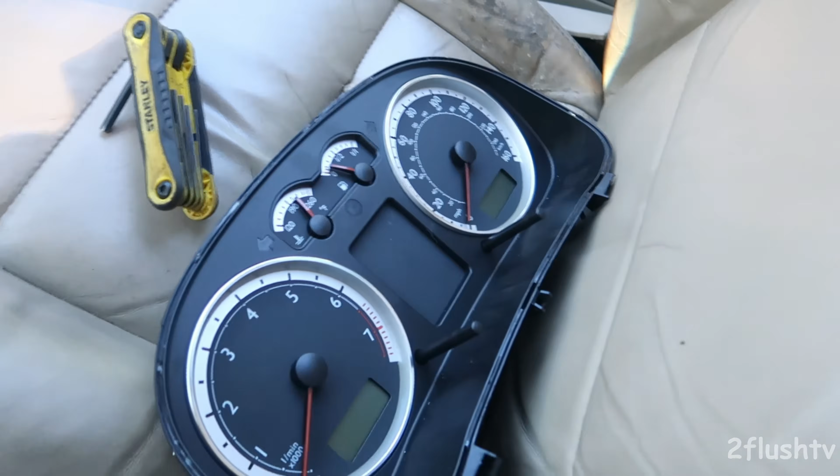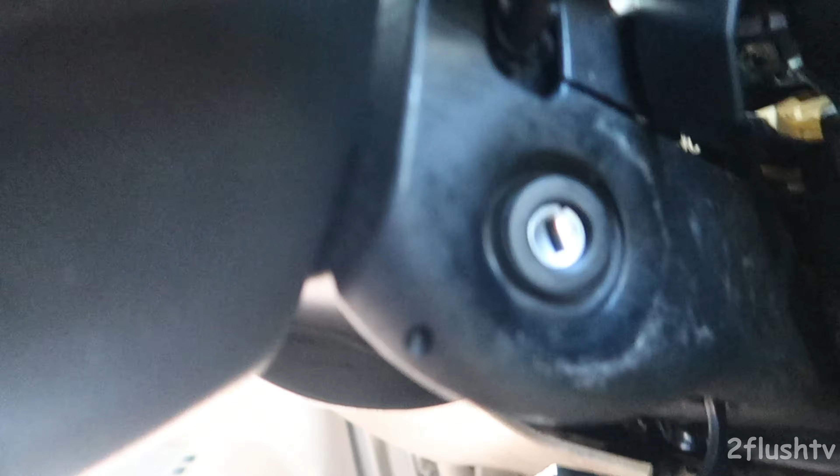So check this out. I went ahead and ripped that cluster out, and these are pretty much the plugs that I need for the Mark IV cluster over there. I need these plugs, so I just gotta figure out where they go and how far they come down, and just rip them all out. I think I'm gonna take this clamshell off too and take this key switch out of here.

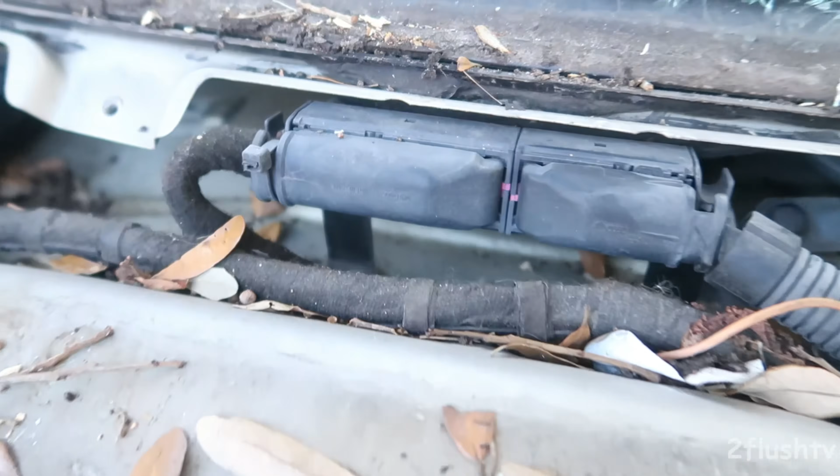So that is one of the plugs that I needed right there. I think the big one is the one that goes to the motor, and then I think that is the accessories one. That's the one I needed, and it just follows down into this firewall and comes under the tray and then connects to everything.

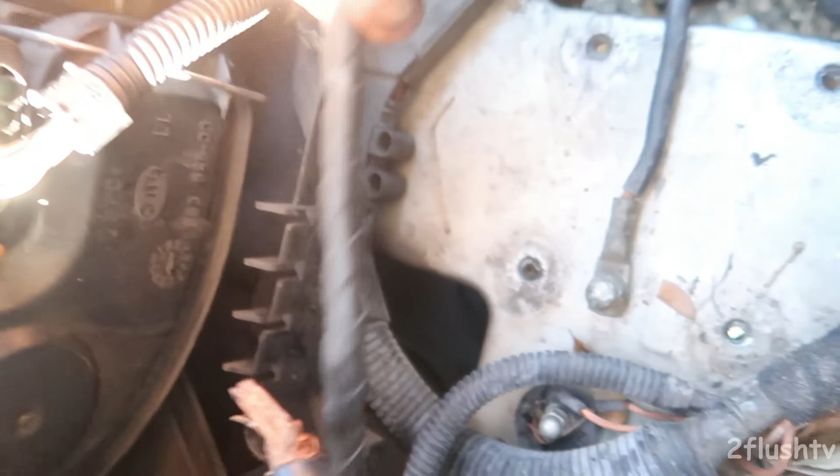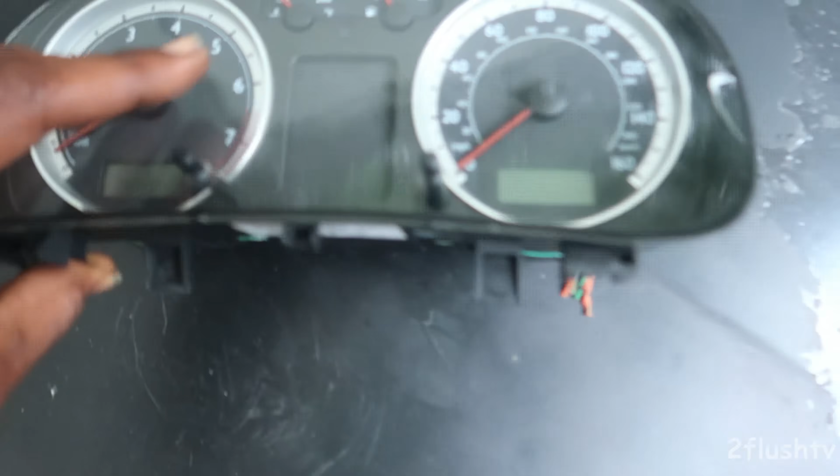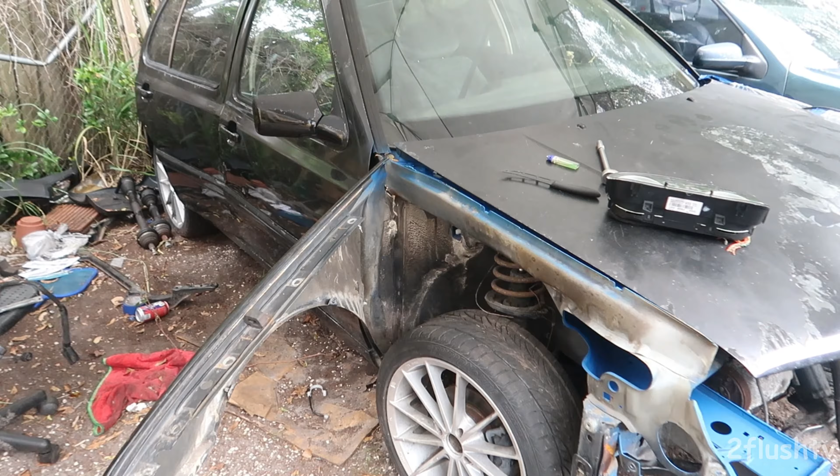Well, it's the next day. It's cold, it's rainy, I'm confused with this Mark IV. I'm all over the place. I don't even remember what I was doing or where I left off at, but this is all confusing to me. Now, granted, this is the first car that I've ever completely built, swapped, did all of this to.

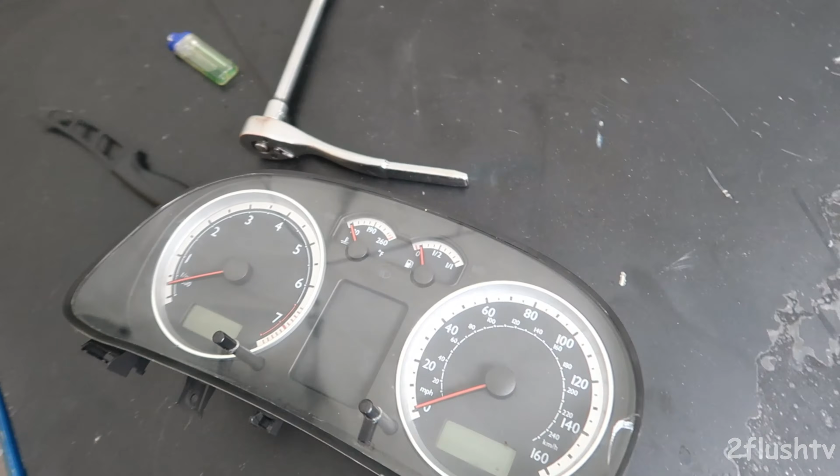And me doing the valves on that is the most that I've ever done to that car. So, check me out here. I'm trying my best here. I'm super confused, but check me out.

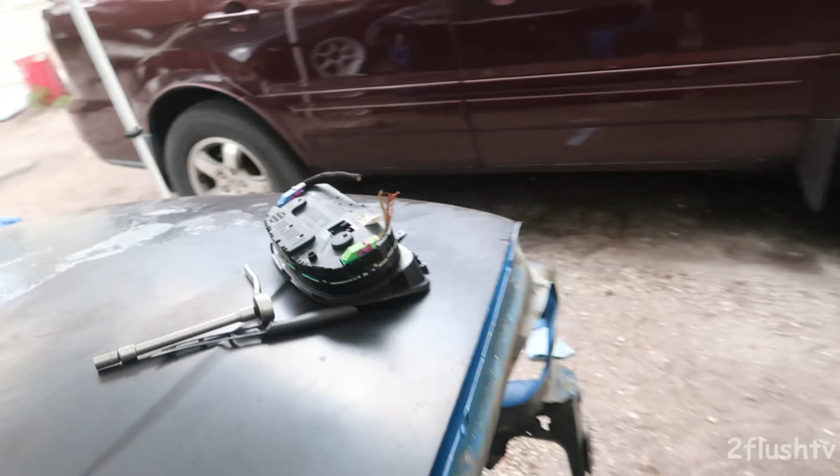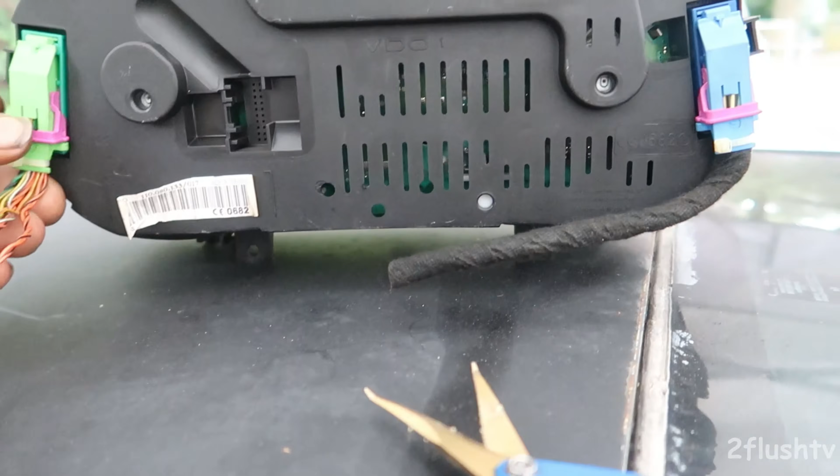This is the cluster for the Mark IV. That is the cluster for the Mark IV, and these are the pins that I needed that I did not have, the plugs. So these plugs are not the same for the Mark III. The Mark III has different plugs, which has one single plug, just like this, with everything wired into this one plug.

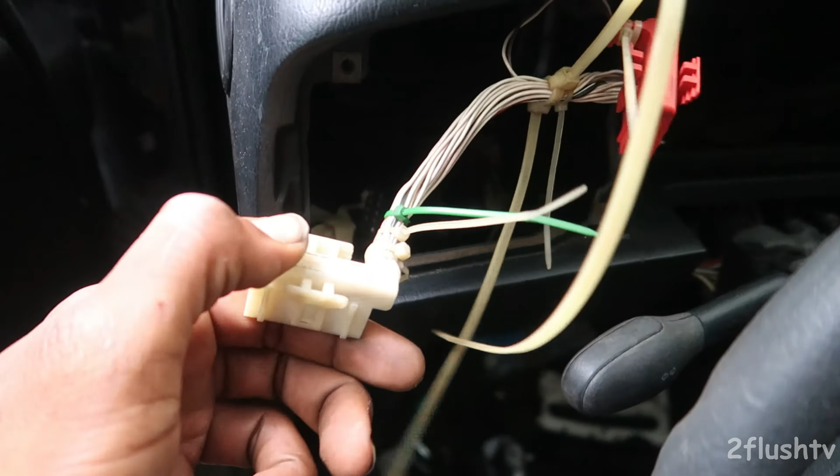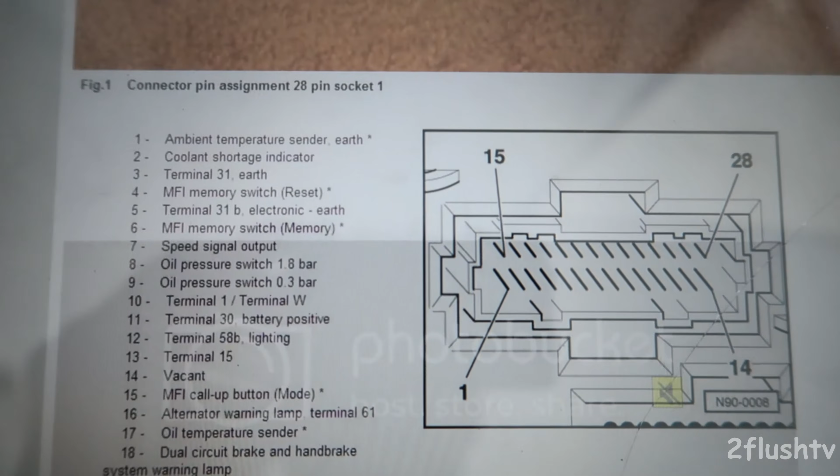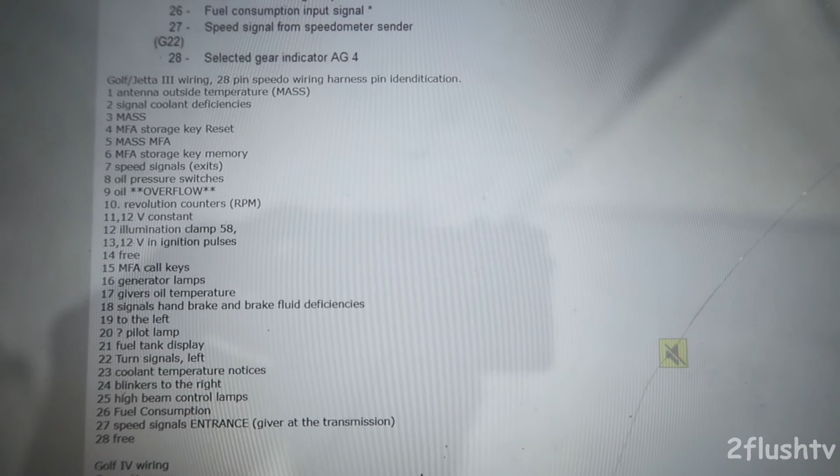Jumped to a forum and found this forum. It's on Vortex, so just in case anybody asks what forum I went to. A guy was trying to do the same swap, and pretty much he found the whole pin layout, all 28 plugs, all 28 pins for the Mark III. And then all of the Mark IVs are right here.

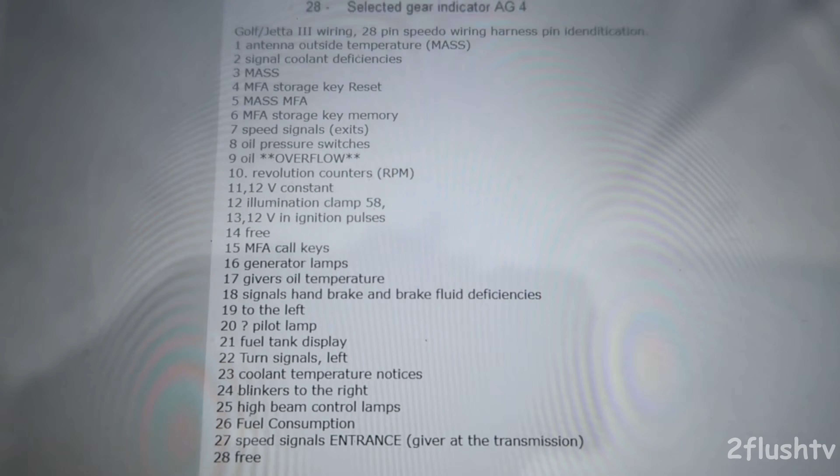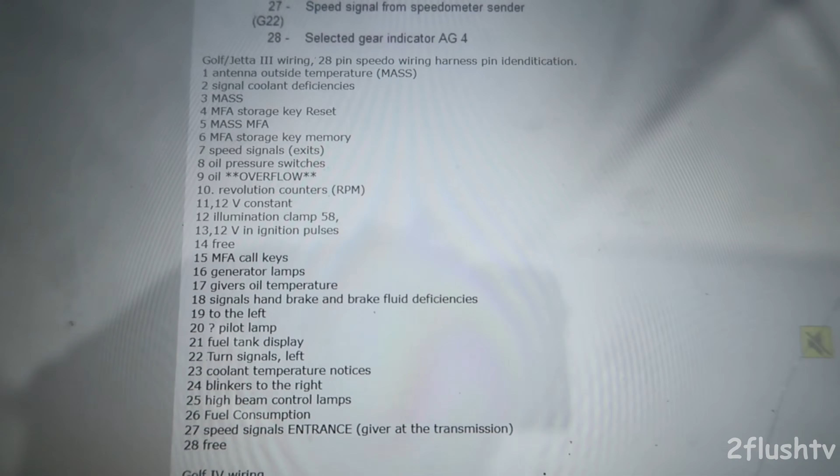Blue harness and green harness. So I think what I want to do is use this same layout of where all the pins are, and I'm just going to splice into this harness. So like those plugs, I'm going to plug them into the Mark III spots on the harness, like the mass air sensor, constant 12 volts, the oil pressure, the fuel, all of that stuff, and then find it over here in the Mark IV one, and then just plug and play it.

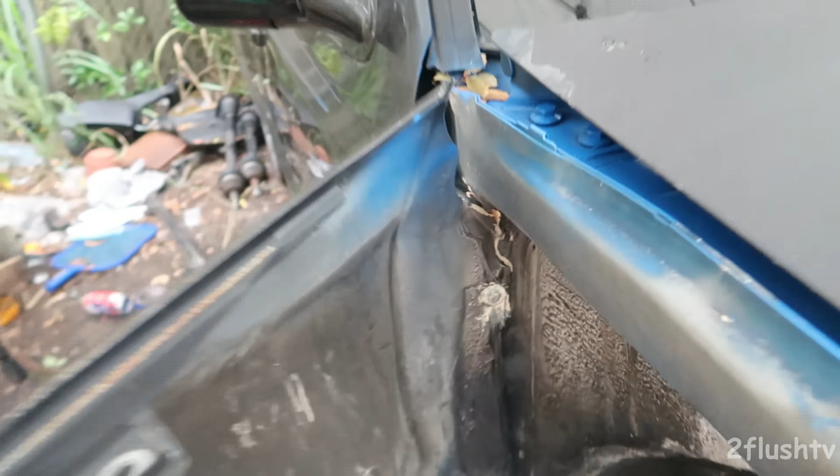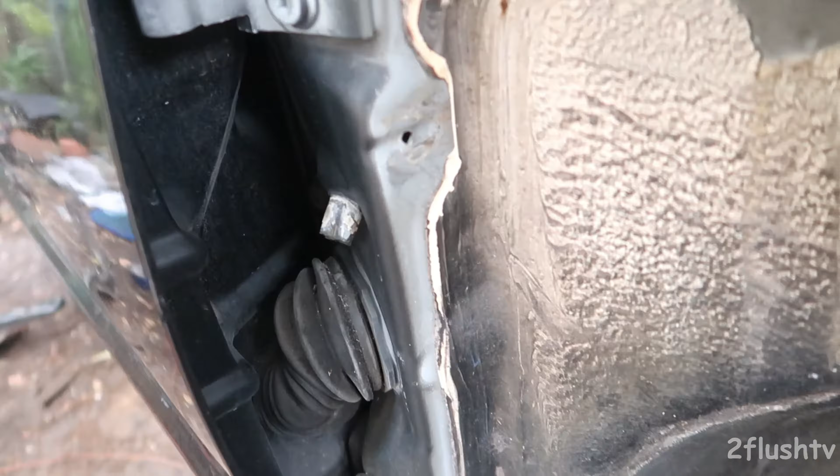But off of this complicated stuff, onto more complicated stuff. I sat here for probably 30-40 minutes peeling back the glue that was stuck on this bolt to get it out, and man, that was dumb. All that glue that was there, dumbest stuff they ever put in these cars.

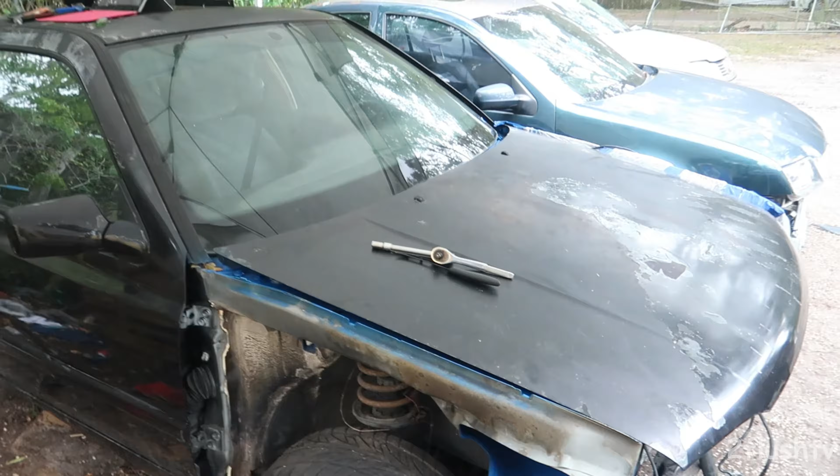I'll say this again, that green one is my first Jetta, my first Volkswagen ever, and this black one is my second one. On my second one, I'm up here trying to do a whole 1.8T swap to it. Wasn't planning on doing it, but I'm doing it. So if any of you guys know more than what I know, please feel free to comment down below, and don't jump in the comments and be like, this guy has no idea what he's doing. Sure, I'm sitting here saying it. That's my first Volkswagen right there, it's a VR6. I just changed the valves in it. It's right there. And this is my second one.

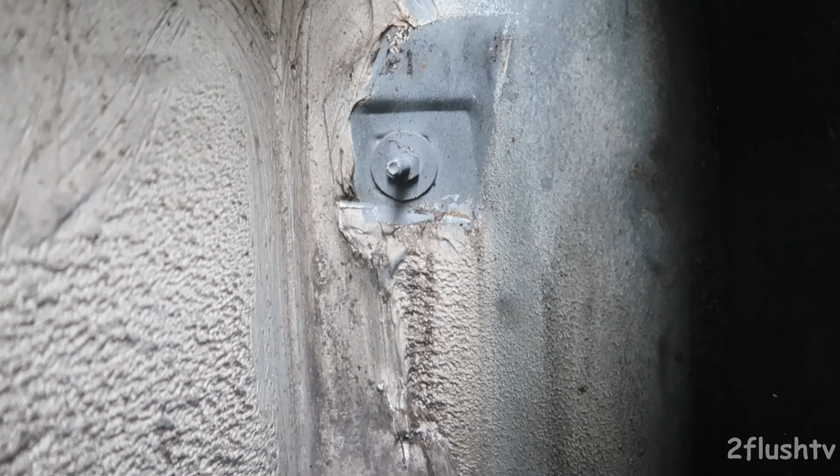Haha, you're wrong. But I need to get this one off too. So the top one wasn't bad because it had the antenna on top of it, but the one at the bottom right there, you probably can't even see it. Right there, it has so much glue caked on top of it. Now I gotta go through and cut all of that out.

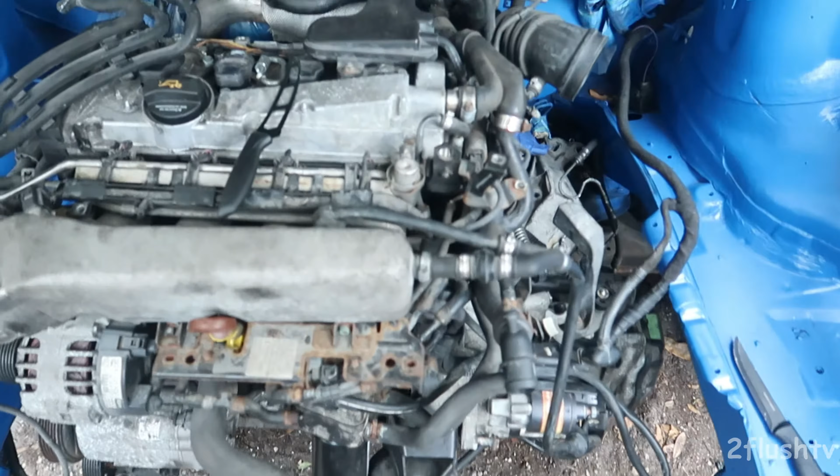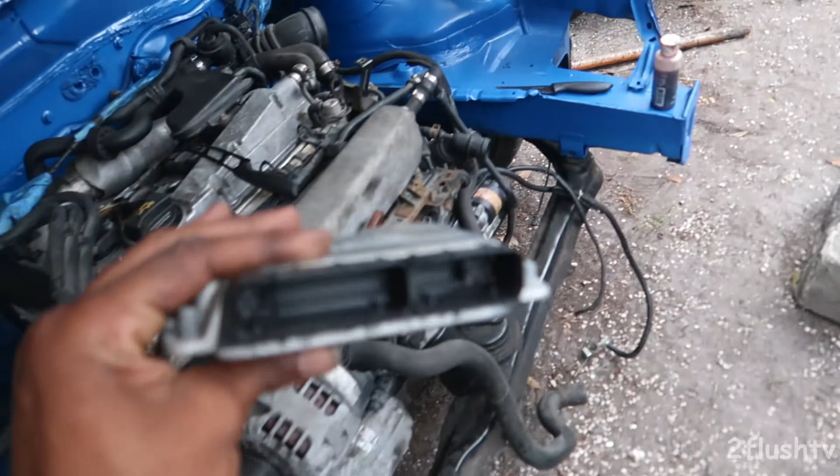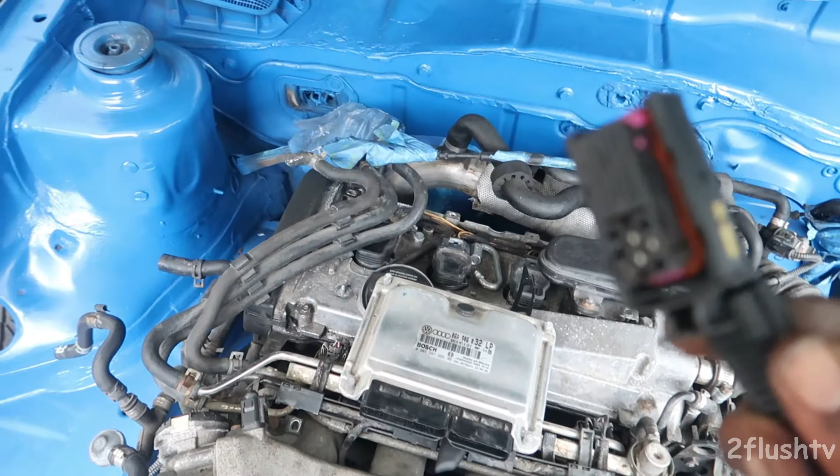Oh yeah, here's the other fancy thing. So, with the ECU here, everything that I thought was gonna be easy, unless I'm looking over this, is on some other whole nother wiring crap. But this is it right here. This is the main engine wire.

This is the main engine plug. It goes into this. So that goes in just like this, and this is how the ECU runs into the motor. Perfect, I get it. Now there is another one that comes off over here. There's a big one.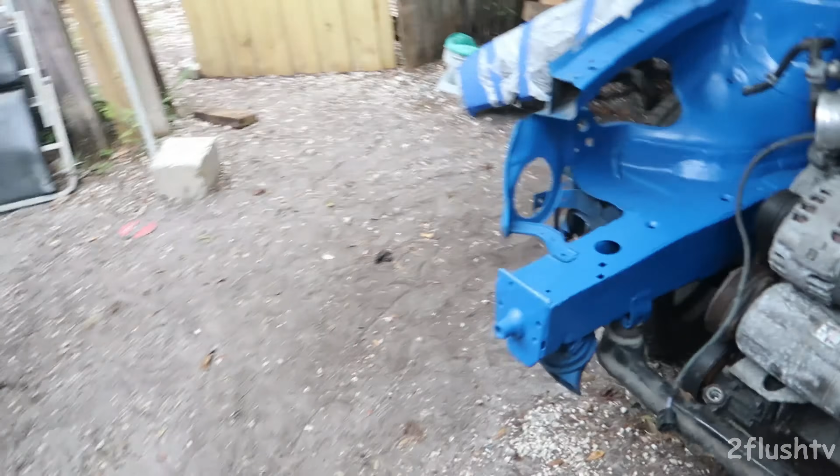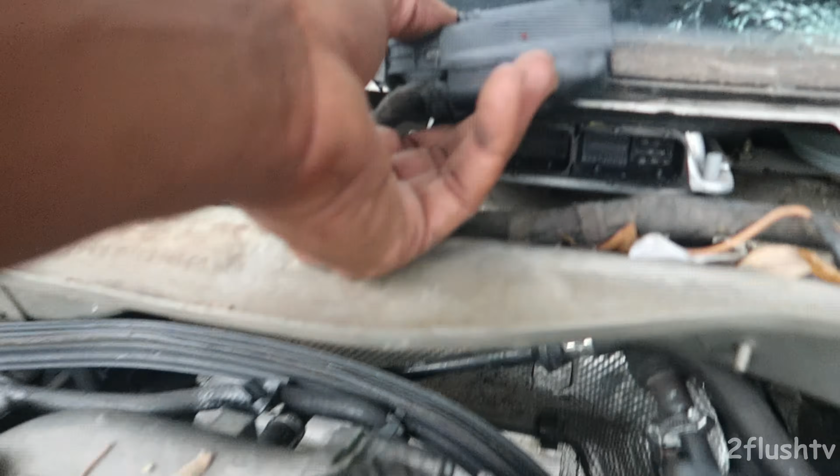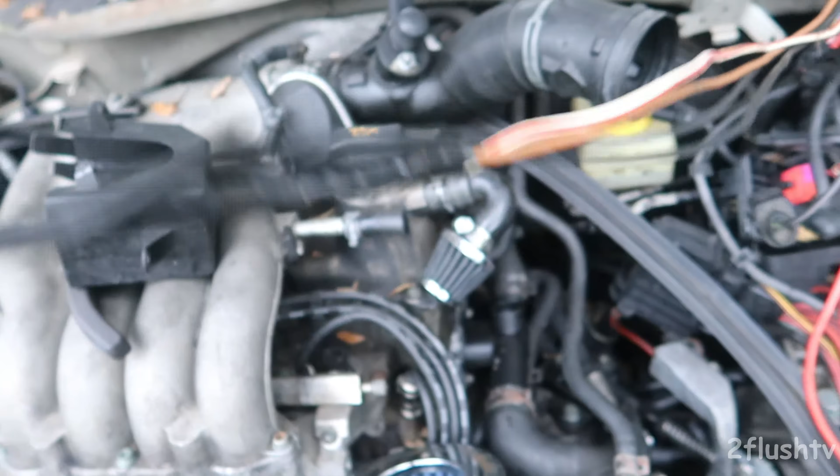So the main harness goes into this one. This one runs the motor and everything. Then there is this one, there's the big one, and that one is this big plug right here. So this big plug has all of these wires in it that goes to the starter and the clutch.

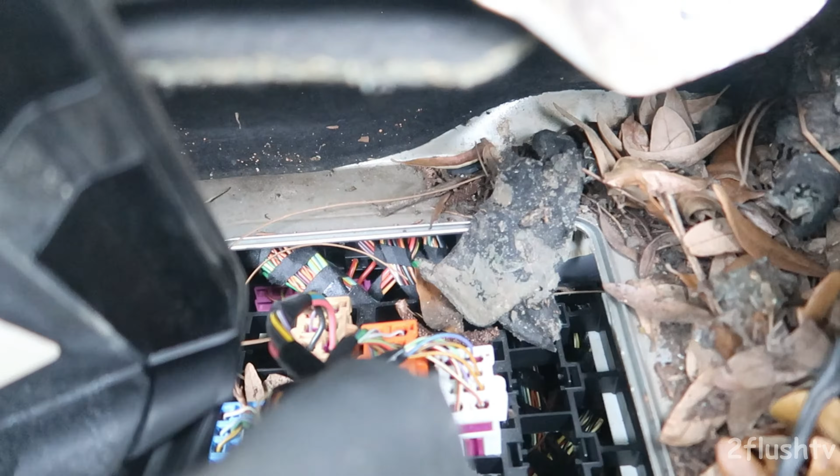That's what I'm stuck trying to pull out right now. I'm having the toughest time trying to pull all of this harness out. Now I honestly just really want to cut it right here, but I'm like, why cut it? Because I think I'm pulling off all of the front, which has the headlights and everything into it. So I feel like I just need to pull all of that wiring out, but then that means pretty much pulling out the whole dash, because all of that runs into the fuse box and onto the dash.

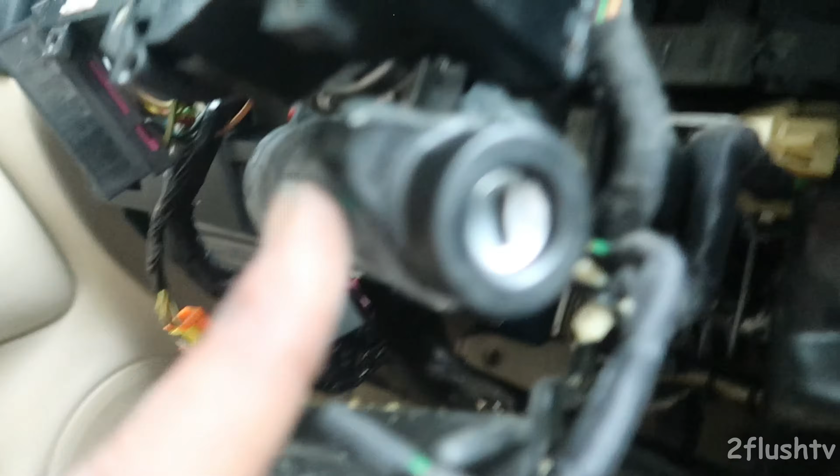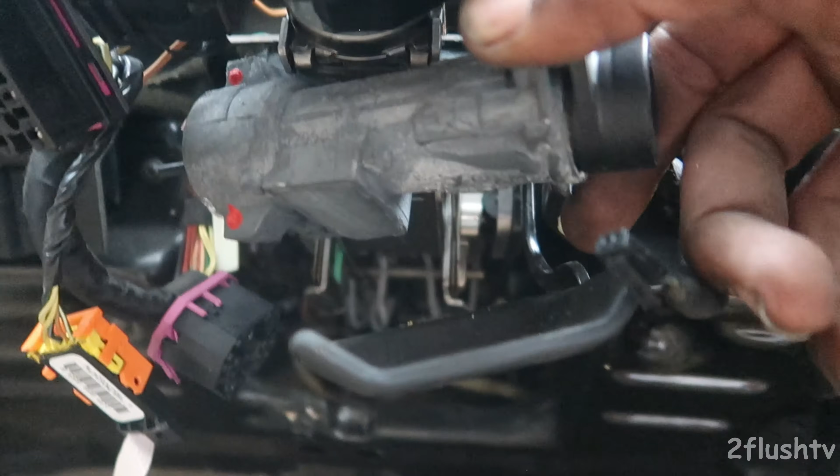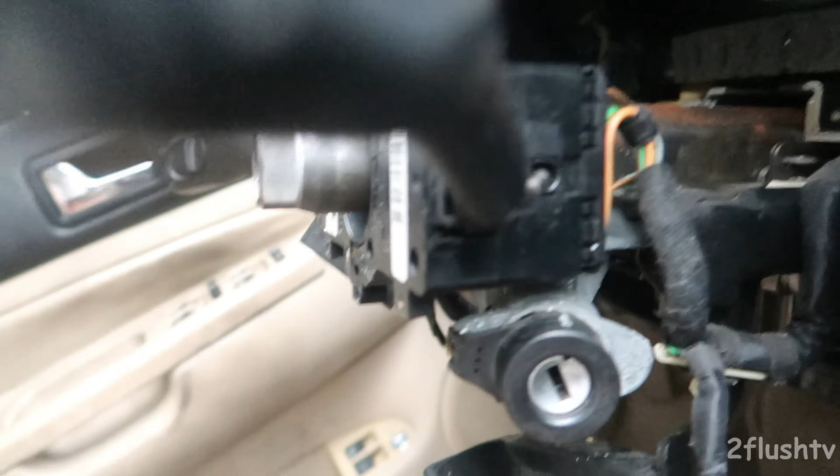And then there is the confusing part of the key part right here. Now I don't know if I'm supposed to take the black part out right here or pull off this whole key assembly, but this does not come off, at least from where I've seen. This does not come off. I mean, maybe it does, but yeah, I can't seem to finagle that off of there. So that is where I am at. I'm pretty much stuck on this part.

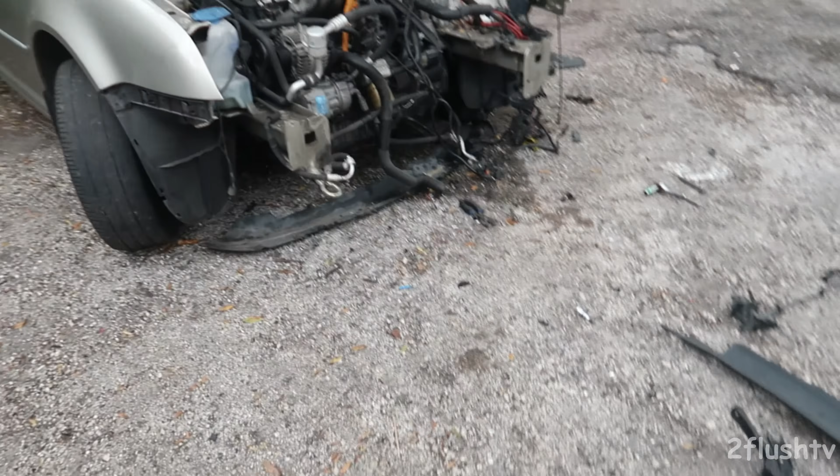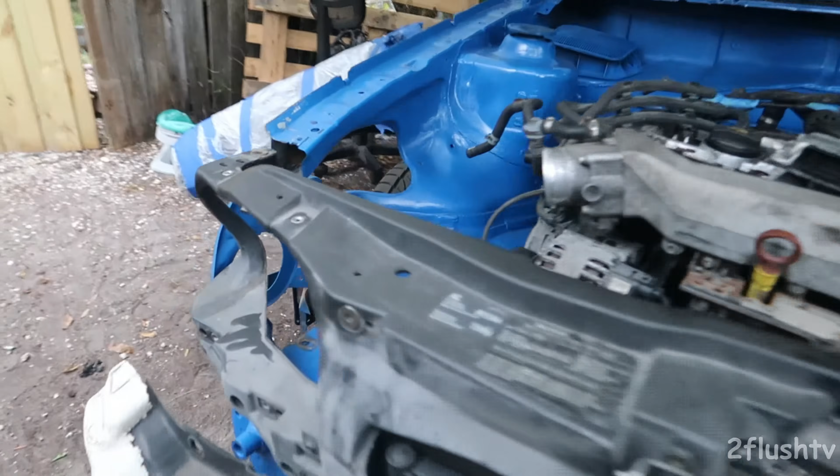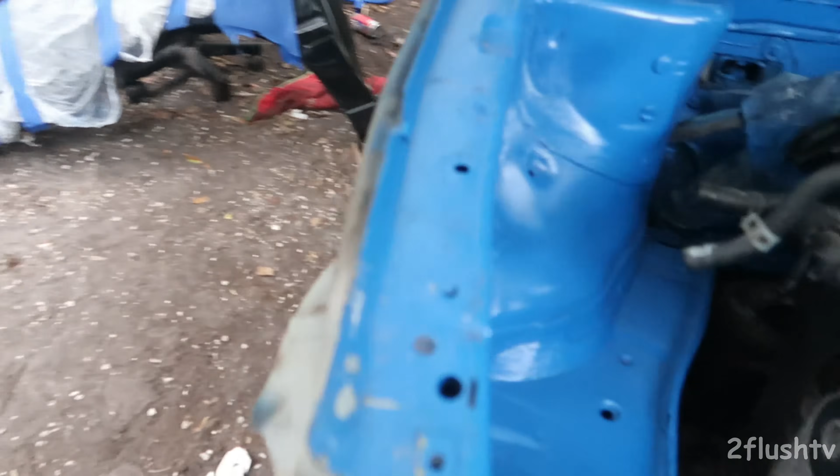So I managed to get the front end, the front radiator support off, and the bumper off. There's the bumper, and I was trying to line this up, the Mark 4 face up on the Mark 3. For the most part, it fits. I came into two main problems. The part of the radiator support really doesn't fit all that much.

If you can see right here, this side is pushed all the way up in right there, and then this side is off just a little bit. Now I have two options I can do. I can take this and push it out more, or I can take this and cut it. Either way, it just needs to slide up in there just that much.

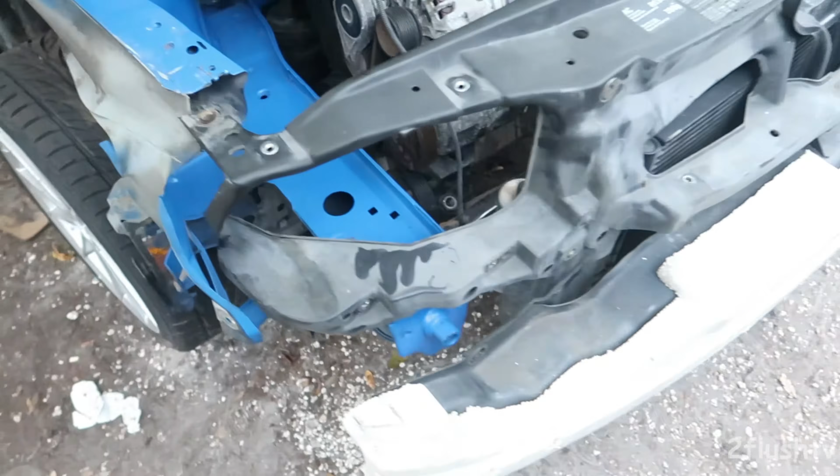But other than that, the rest of it does fit. It clears the bottom. This part of the radiator will be under the support right here, and everything else does go ahead and clear. So I am super happy about that. That works out super perfect.

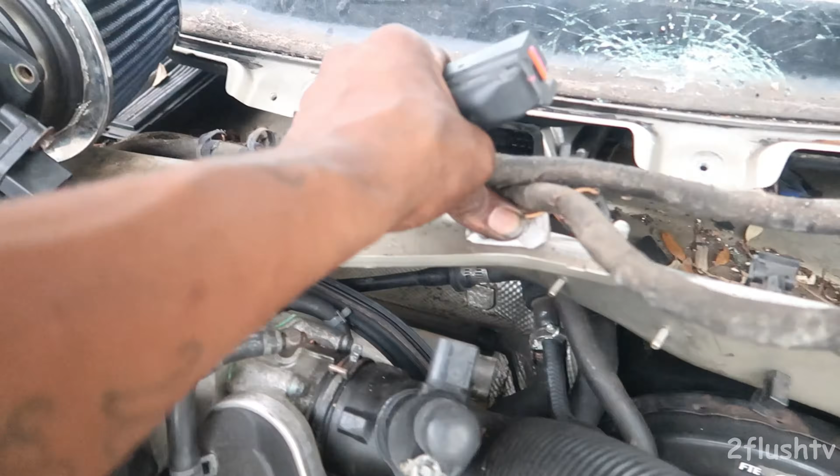And now with the harness, this is what I've really been working at, trying to get this harness out. Like I was saying, this is the other piece of the harness plug that I need right here, and this pretty much controls the front end, the starter, and the clutch. So, and a lot of this goes to the dash, and it's inside of that right there.

So I need to pull off all of that, and then I'm probably not going to use any of this, so I'm probably just going to cut it all off and not use it.

But other than that, I am wrapping it up with this Mark IV right here. I still do need to go ahead and pull off the hub assembly, and I need to pull off these back tail lights because that is going on the Mark 3, and finish pulling off the mud flaps. Go put that back in the house.

Okay, I think I'm just going to remove these plugs right here. I need to take a picture of this right quick so I remember. Looks like purple goes to white, black goes to purple, orange to orange, pink to pink, blue to blue. Let me take a picture still.

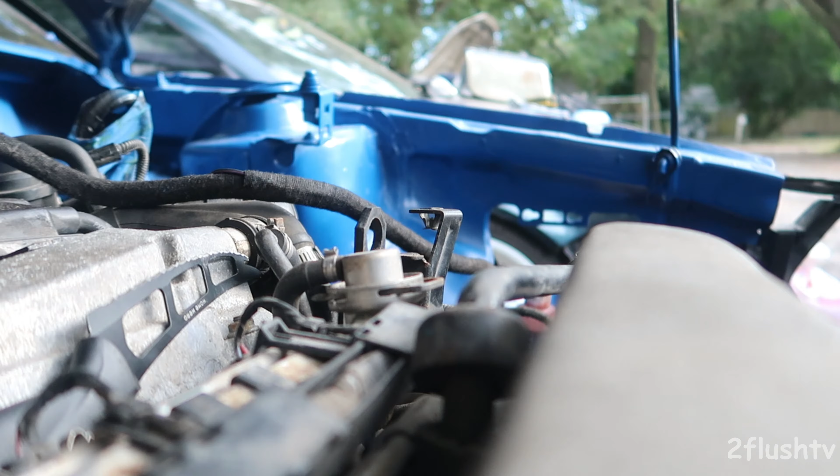Alright, so I just got the plug off of the Mark IV. Now this was one of the main plugs that I was saying I needed right here. This part goes into right here. Now, let me open it up first. So yeah, that part goes into that plug right there. Now, I needed that.

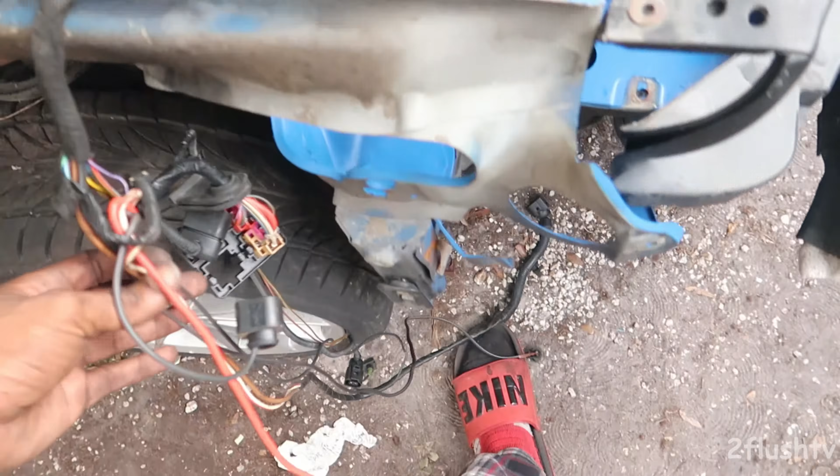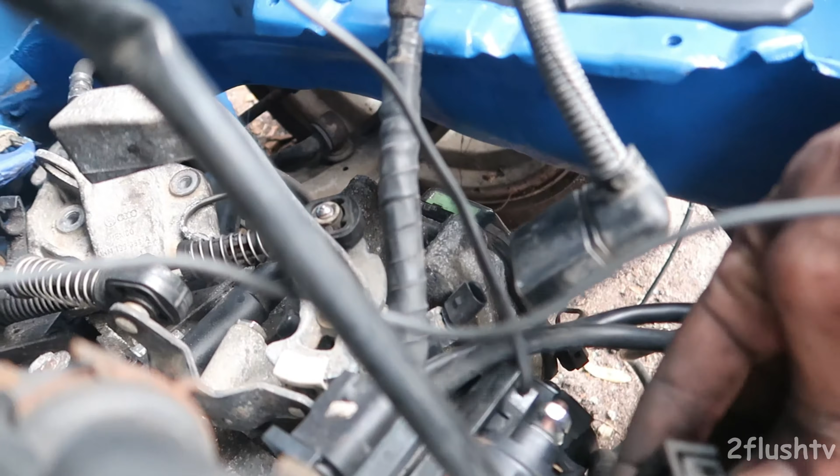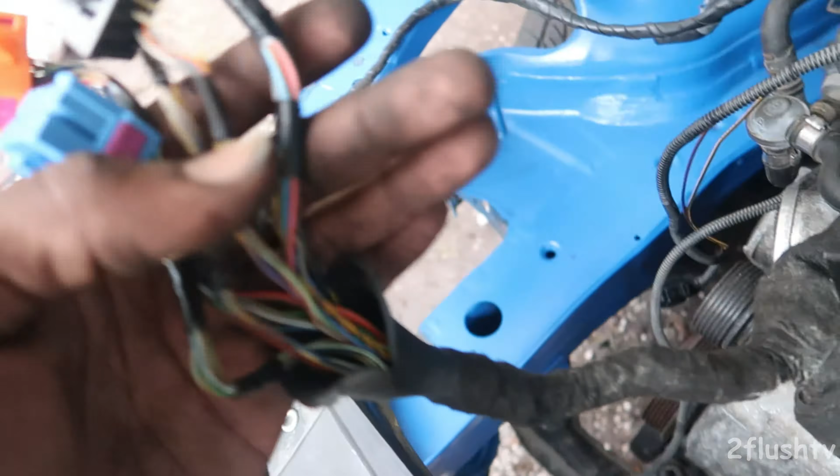I don't even think I need all of this. Maybe I do, maybe I don't, but I don't. All of these plugs right here, I don't think I need all of these, because at the end of the day, I really only need this plug right here, which goes into the starter like that, and then there is this plug right here that I need that goes into the right there. So at the end of the day, those are really the only two plugs that I needed, and I needed that to go into there. So I don't really think that I need all of these plugs. Maybe one of these plugs powers that down there, but I don't think I need all of these.

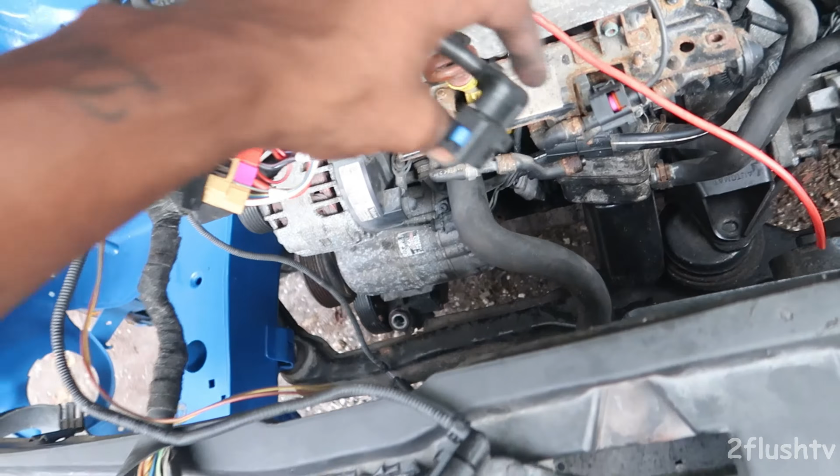So again, that is where I'm at. I know I say that a lot, but this wiring system is very confusing to me, and I am learning as I go. So that's where we are.

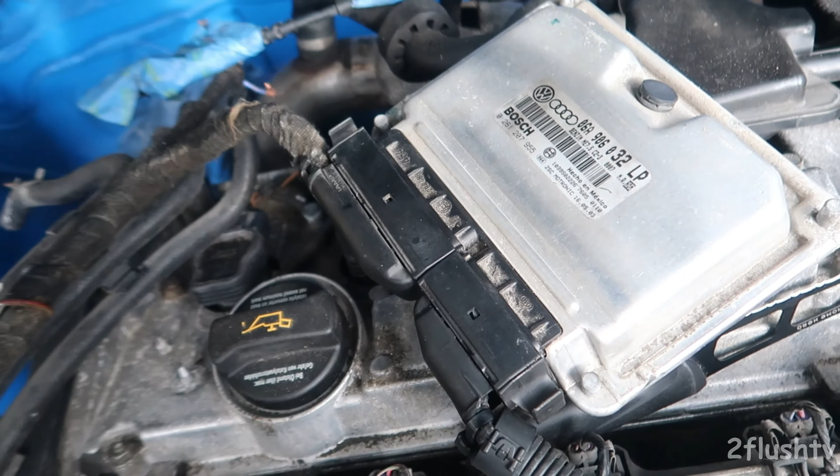I do have all the plugs to the harness though, for the ECU. I do have all the plugs for the ECU though, so that is awesome right there.

Now I gotta figure out what wires come off of here and go inside of there. Sorry about the wind, it's really picking up right now.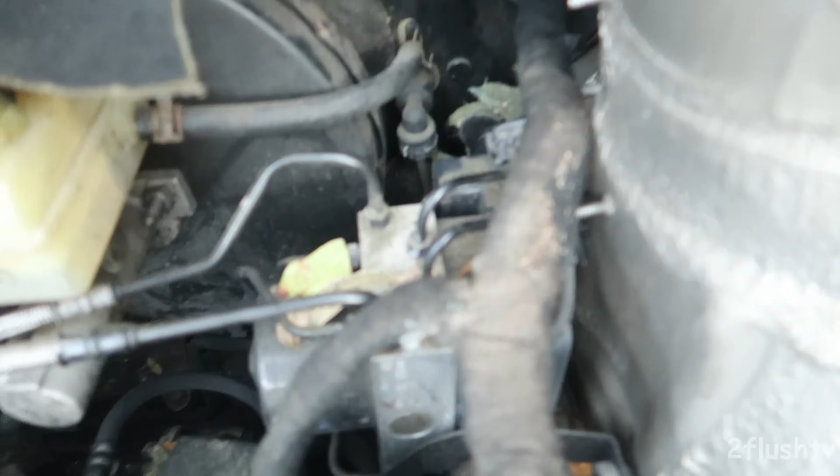Because now I gotta figure out how to wire all of this to the cluster and to the fuse box, which I think that is what this harness is. So that goes to the fuse box right there, and then this is the rest of that harness right there.

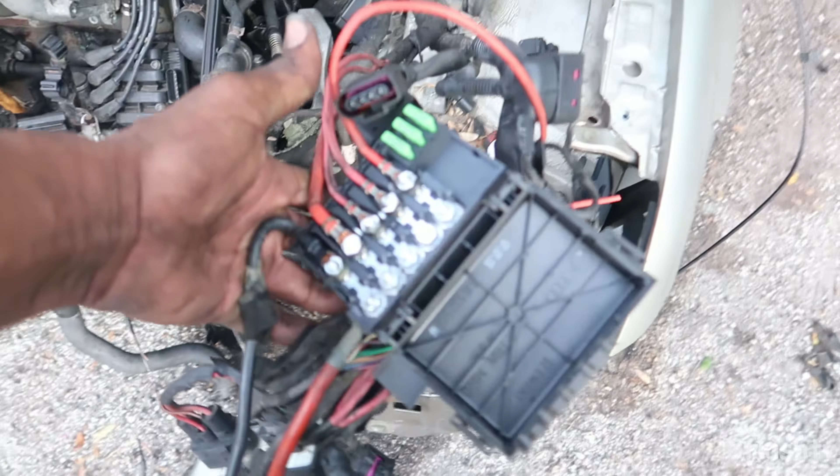So I think now I need to go in and pull off this fuse box right here, and then whatever wires come to this right here, that way I can eventually pull off this key. So then I pull off that key, and then I will be done with the harness on the inside of here.

I know some of you guys are Bentley owners, and you guys own the manual to all of this stuff. I don't own a Bentley, probably will never own a Bentley in my life. I know I probably need one, but I work by looking at things and figuring it out, not by reading it. I never worked that way in school. That's probably why the teachers didn't like me anyways.

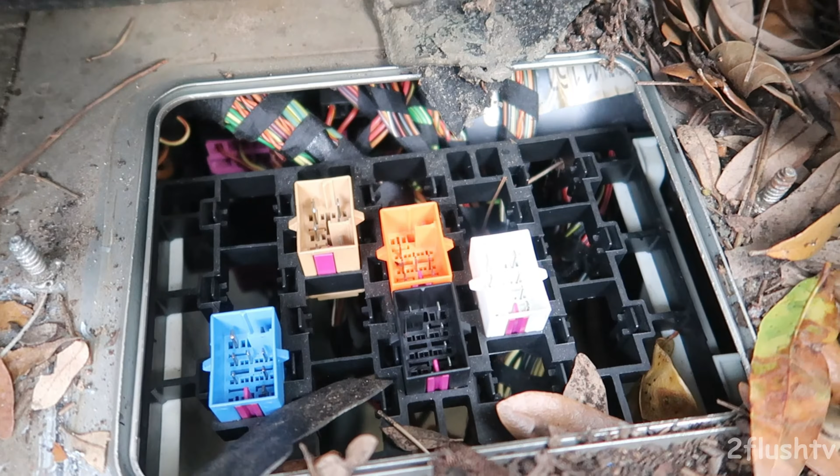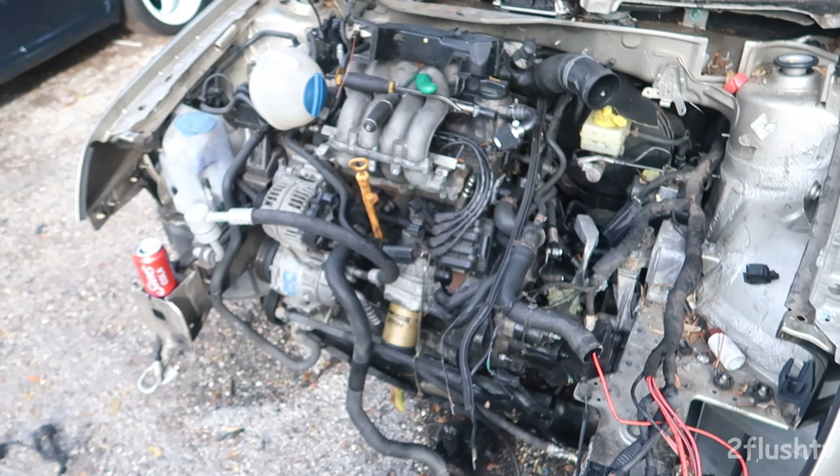To be honest with y'all, I think I'm done for today. This is too much. I'm sitting up here thinking about all of this. It's too much, I need a break.

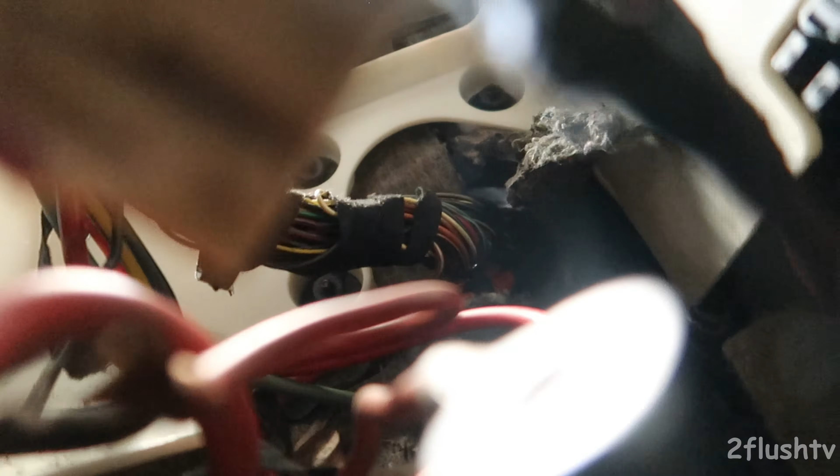If you can look right there, see that big ball of wires right there? All that has to come out of that hole right there. That is all the harness that's inside of the dash. So I guess I need to pull all of that out here because that goes to the fuse box.

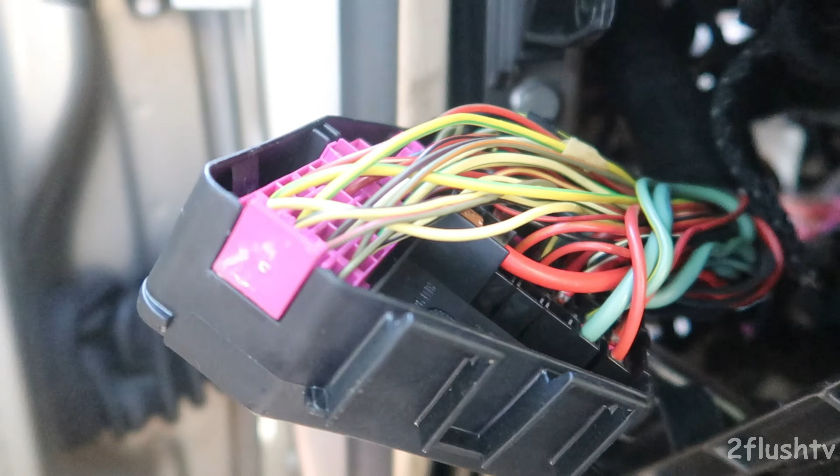Like I've been saying, I don't know if I can use my fuse box. I got the harness of what I need off the harness. I'm trying to figure out what I need to do to go for the key.

Again, I'll say it over here. I have everything for the ECU ready now, right? But I still don't know the wires that I need to run through there.

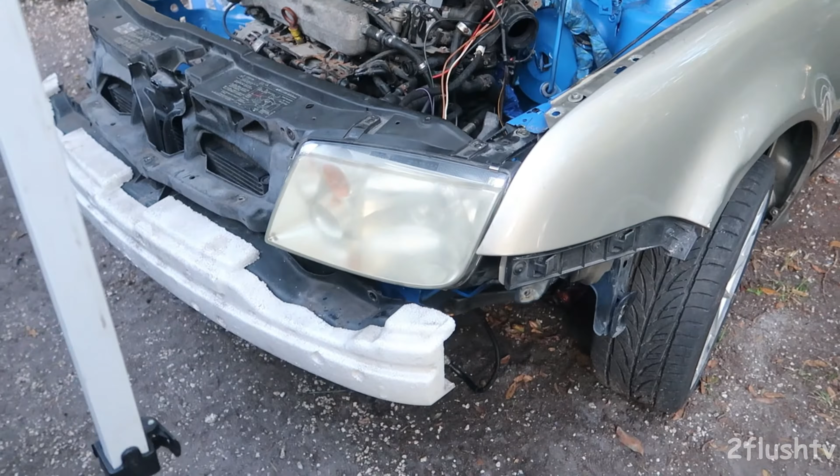So check me out, I put the fender on, the radiator support, and the lights. Nothing's set in stone right quick, everything is just kind of sitting there. But I like how it looks. My only one thing.

Guys, ready? And you better not talk crap about it. It's right here.

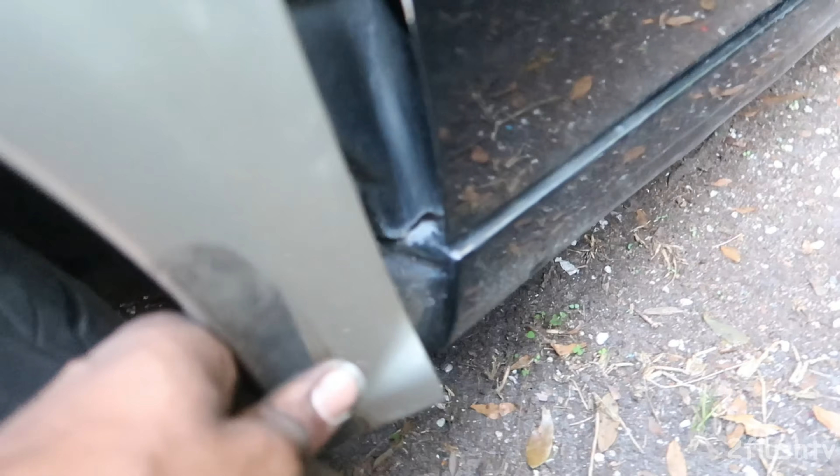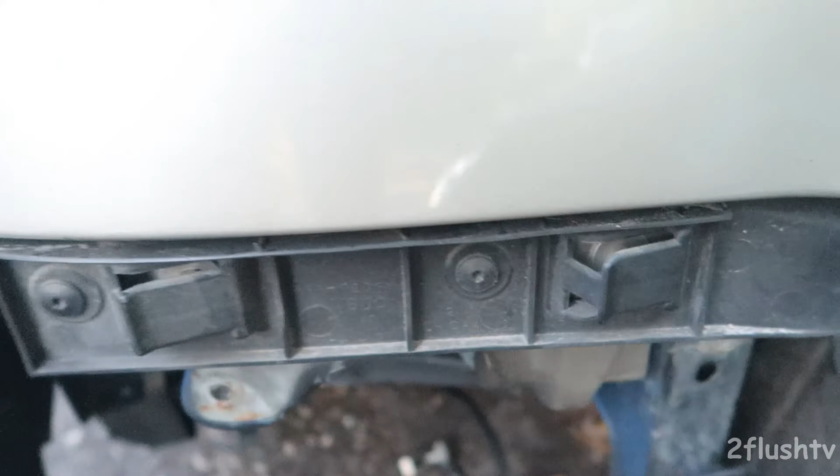Now, I was trying to take the fender and push it as close as I can to close this gap up, but this is really the only gap right there. When the bumper goes back on, we all know the bumper sits on this right here, so there will be no bumper gap. But that's the only gap I have right now.

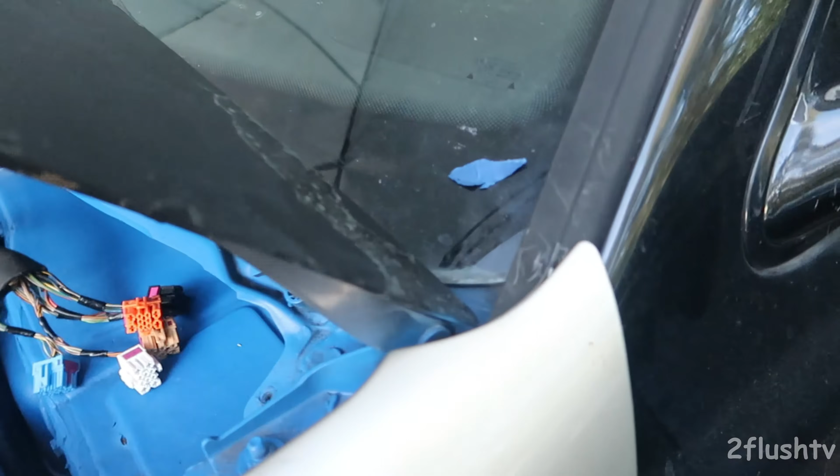And I still have to put the hood on. The hood is going to line right up with this, so that's going to be no problem. But check it out, what do you guys think? Drop a comment down below.

I still have the Mark III stuff. I'm not getting rid of the Mark III stuff because I do like the Mark III front end. I just so happened to come across that and wanted to see how it will look. So yeah, I'm not getting rid of the Mark III front end, this is just to see how it looks. If I can figure this out right, I'm probably gonna do this swap.